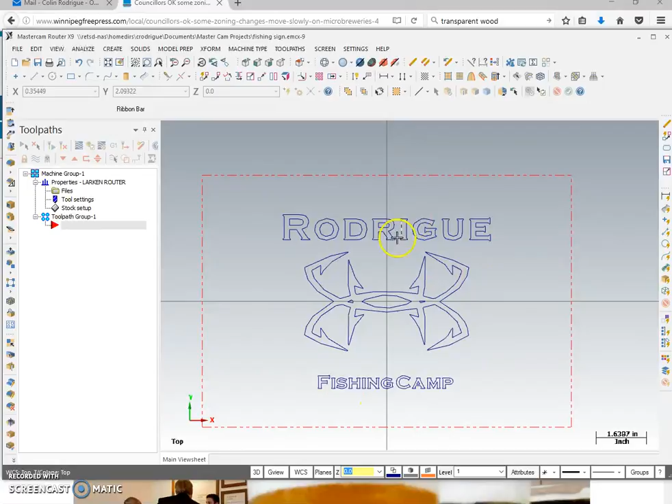So we have our original sign there, Rodrigue Fishing Camp. What I want to do is show you that you can use the router to cut out the shape for you if we wanted. We could do just a simple rectangular sign, or we could make different shapes out of that. You could draw a circle around it if it was the right size, or you could draw an ellipse, an oval. We're going to go ahead and create a rectangular shape.

What I'm going to do is turn it into an oblong shape or an oval at this point, and we want to do our anchor point from the center here. That means we're going to start it at the origin where our XY axes meet. So I'll go ahead and click there once, and you'll see it comes out from the center equally. I'm going to draw this as big as I can and have a look and see if that's what I want. Oh, that'll be a really nice shape to have.

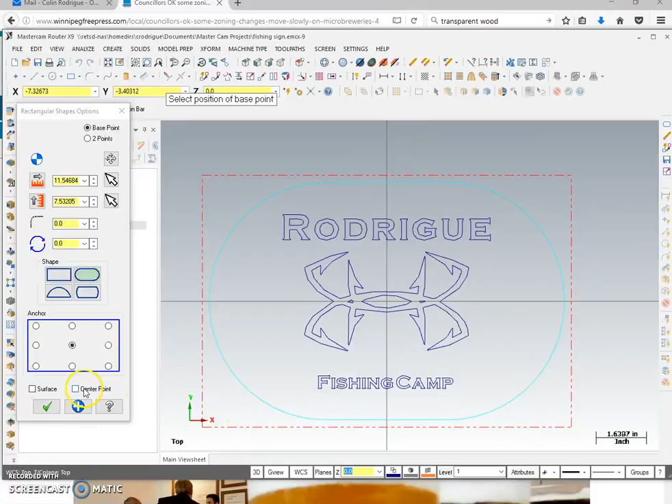So exciting. We could also go ahead, I'm going to click OK here just to get out of that and save it because we're happy with that. But just to let you know, you could also download a shape or a picture, and you could find a fish shape and have it cut out that shape as well. There's all kinds of shapes you can do, right? Stars, moons, whatever shape you want to have on there.

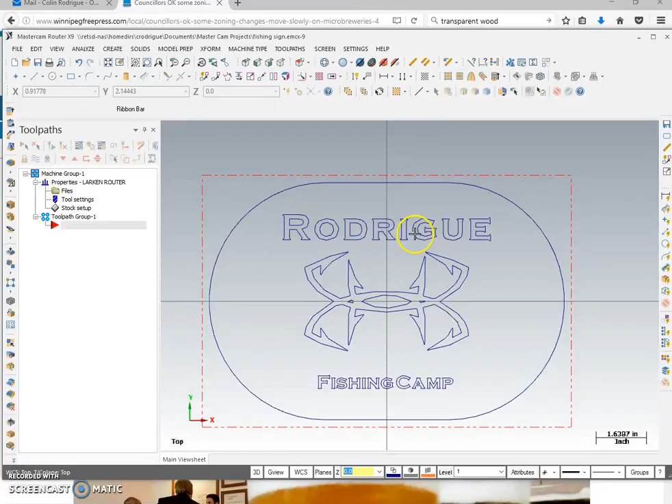So what we can do now is tell it how we want to cut that shape out. We had that original toolpath, but I got rid of it. We're just going to review that again, and we're going to have it engrave this part here. So I'm going to go ahead and select all that, and I'm going to go transform, toolpaths, contour, fishing sign, and let's draw that again. I should have picked that first.

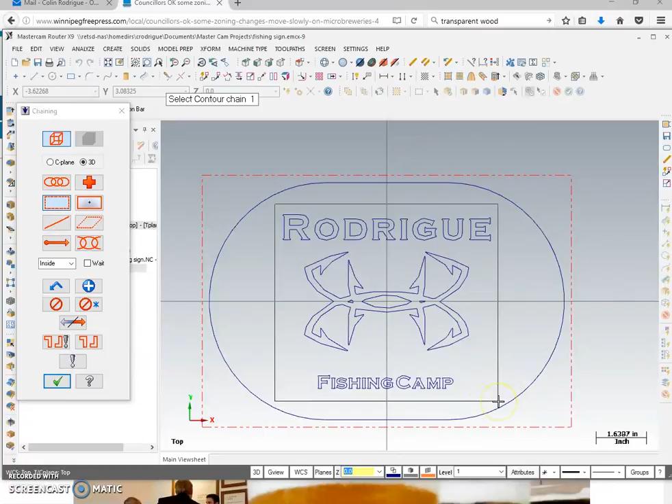So you'll notice here sometimes you have to select, we want to do a window. We're going to do that, and we're going to just select around what we want it to engrave. I don't want it to engrave that oval, I don't need it to. I want to make sure I have all my letters and pictures selected, go ahead and sketch approximate start point. We'll start it there, why not? And then we go ahead and click OK on there.

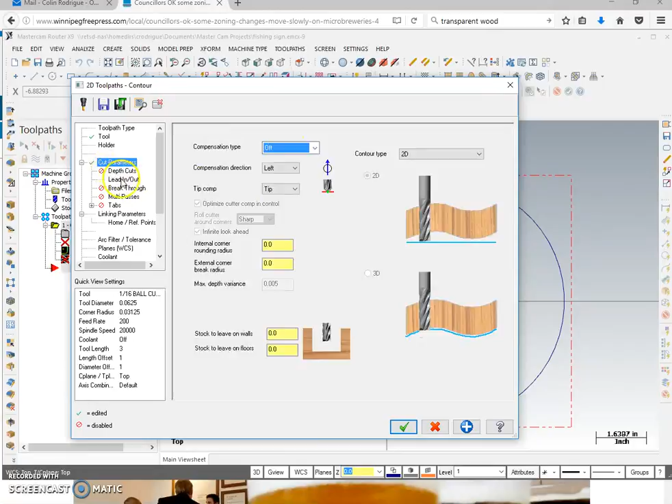Toolpath type is a contour at this point. Tool is a 1/16 inch bit, which is good. Then we go ahead and go to cut parameters. We've done this before, this is a review. We turn that to off, we do not want lead in, lead out. And we just go to linking parameters at this point, and we change all of these to absolute. Then we go ahead and set our depth at 0.03, and we click OK.

That's going to engrave Rodrigue, the Under Armour fish hook logo, and Fishing Camp. Exciting, great. Now I want to have it cut out this oval sign for me. I could cut it out on a bandsaw by hand, I could draw that and do that, I could, but I can also have this machine do it for me.

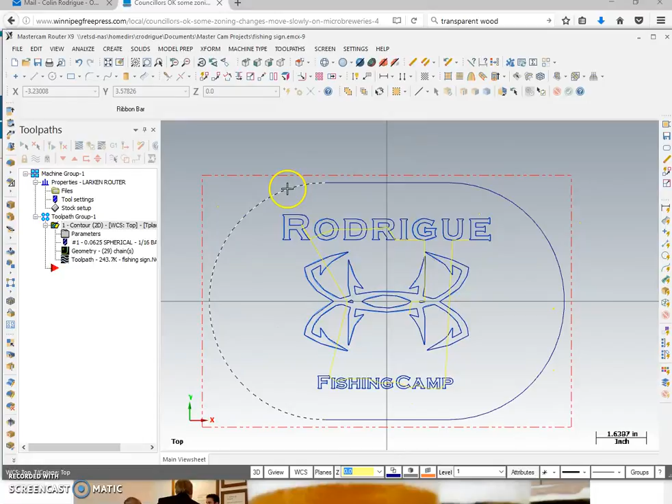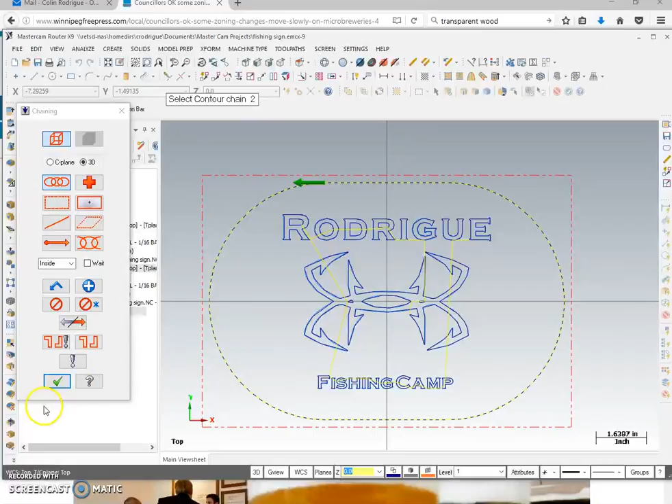So it's a different toolpath, we're going to have to do a separate toolpath. So we go toolpath, and then we go ahead and choose contour again. We're going to use chaining to select it this time, so we just want to select this chain of the oval. I click that, and you'll see here it highlights that whole chain. It didn't highlight any of this stuff, I don't want it to do that, just that outside oval. And I go ahead and click OK again. This time it's a contour again, but our tool is going to be different though.

We're going to use a 1/4 inch straight bit for that. So we go ahead and find that here. Straight bit, 1/4 inch, number 145. That's the size of our cutter to cut that out. We go ahead and click OK.

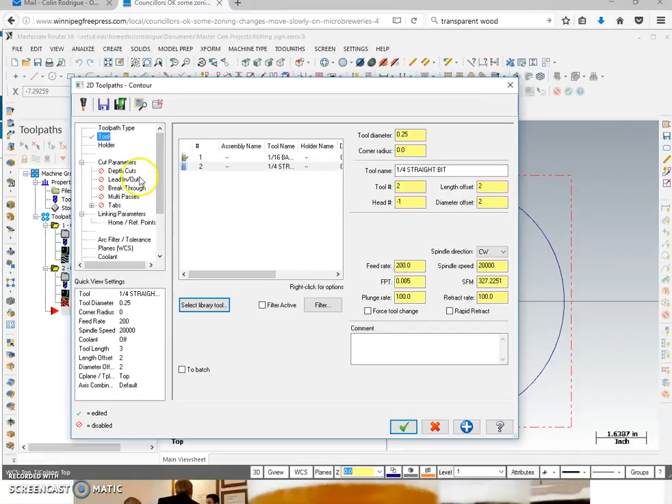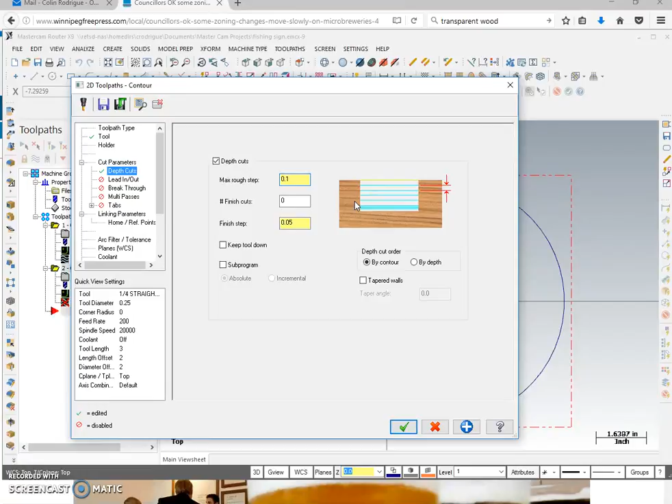Now, cut parameters. That can still stay off, that's fine. Depth cuts, we have to do depth cuts. We don't want to make this in one cut, it would break the machine or break the bit and just be unsafe. So we have to add depth cuts, and our maximum rough step will be 0.1. We'll make it an 1/8 of an inch, 0.125, and then it'll do the last one at 0.05. That's good, we're happy with that.

Lead in, lead out, we don't need that at this point. One thing we do need to add though is tabs. A tab will leave a little bit of wood at the 4 corners so that when we cut this out, this part doesn't break free and slide into our cutter. So I'm going to leave a very thin little bit of wood at the 4 corners. I'm going to show you how to do that now.

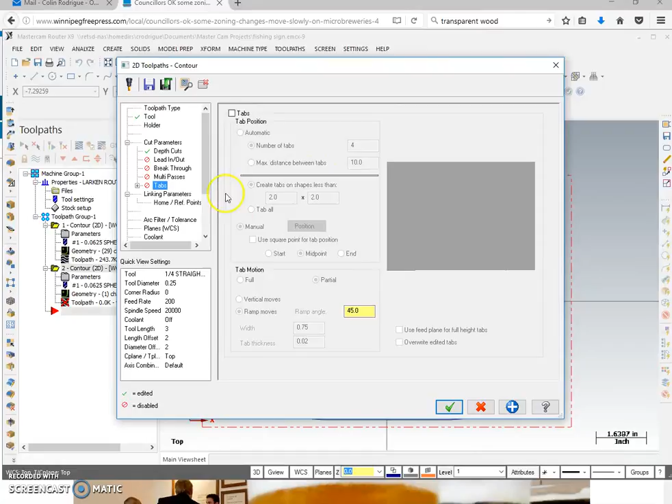So we select tabs here. We go to tabs. Now, we could have it automatically position tabs, but I don't really want to do that. So I go ahead and change the size of my tab. 3/4 of an inch wide is fine. I'm going to make them 1/8 inch thick, so they're a little bit thicker than what it suggests, which is fine. Now position, you'll notice this little window pops up here. You got to look for these little windows, they're there sometimes when you don't expect them.

Select chain to add tabs to. So I'm going to put one here. You'll see there's my tab, I slide it around. I'm going to put one there, one there, one there, one there. Now if you read this whole thing, it says select chain to add tabs to, press enter when done. So now we go ahead and hit enter on our keyboard.

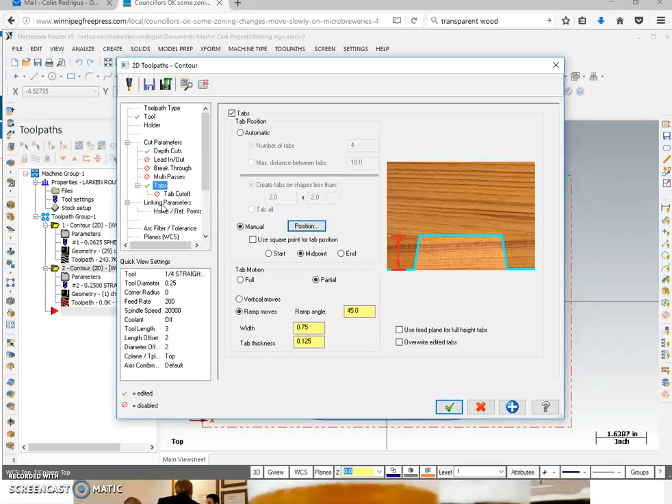We're back to our 2D toolpathing. We've done the tabs, that's okay. It's going to leave that little bit of wood we can just cut off quickly on the bandsaw and sand the tab off. Back to our linking parameters. Our piece of wood in this case was 3/4 of an inch thick, so our depth is going to be -0.76. We'll have it go a little bit deeper than what we need to, just to make sure we get through and cut that out. Okay, we go ahead and click OK.

Now we're at the point where we have the contour to do the engraving, and we also have the contour to cut out this oval shape for us. Now, what do we want to do? We want to verify this. We go ahead and click the select all operations. We're going to regenerate them all so that they've been refreshed, and then we're going to verify selected operations. Go ahead and click that.

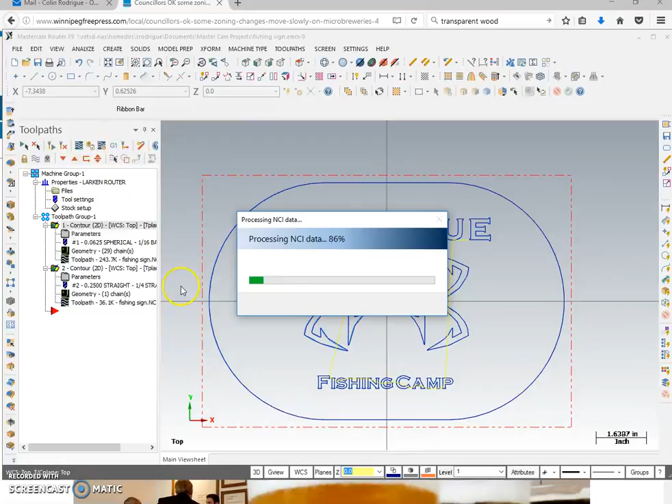It's going to do a little bit of thinking there. Never hurts to think. Now, if you take a look here, this is our piece of stock, this pink board here. And we go ahead and click play. Then it's going to do our engraving, and then you'll notice if we did it, let's go back a little bit. I wonder if we can slow that down just a little bit. Let's play that again.

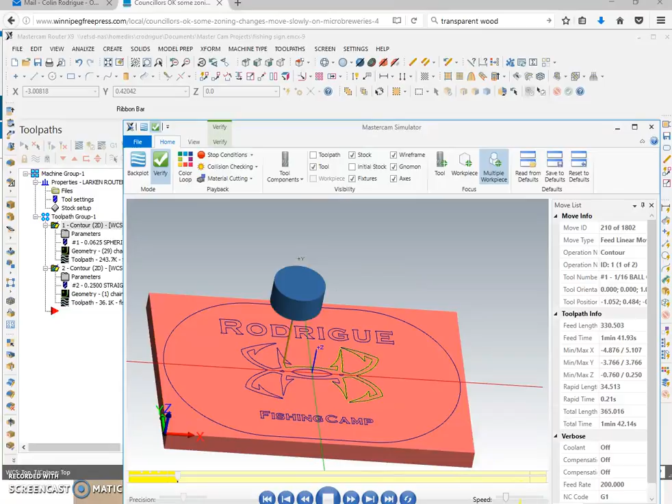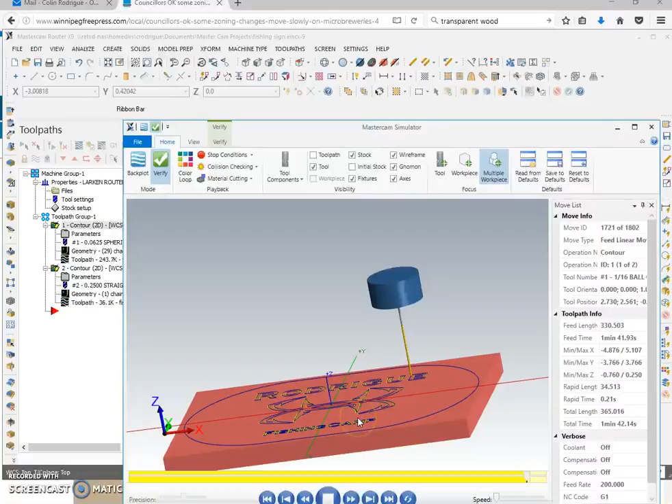Okay, you can see that it's doing the engraving of our logo, my name. Let's speed it up just a little bit because we're going to just show at the end here. I want to show how it's going to do that in multiple passes. It's going to change the bit to 1/4 of an inch on here. Okay, see how it changed it? 1, 2, 3, 4, 5. Leaving the tabs there.

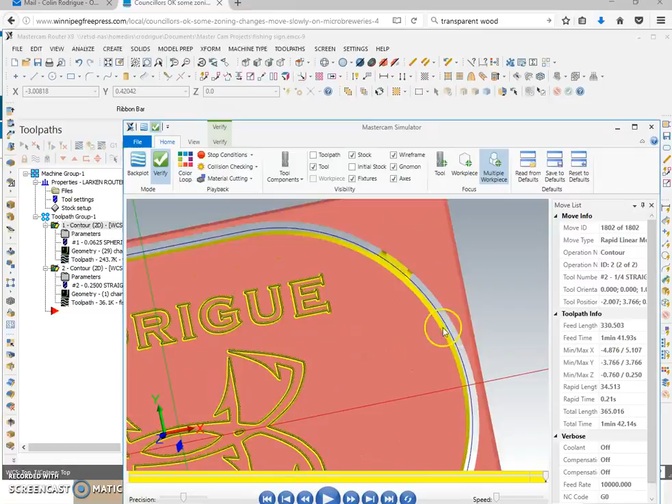6 passes. So it's going to take 6 passes to cut that out. You can see here how it's left that little bit of tab material there. Now that piece is still anchored to our main piece of wood. It's really important to do, okay?

So now we're done with that. We can go ahead and close that. We can see that it's doing what we want it to do. If it's not looking right, then come and get me and we'll see if we can figure it out.

Now, what we have to do is deselect all our toolpaths here. So we deselect them. Now, I want to export these one at a time. I now have to turn it into X's and Y's that our machine can understand.

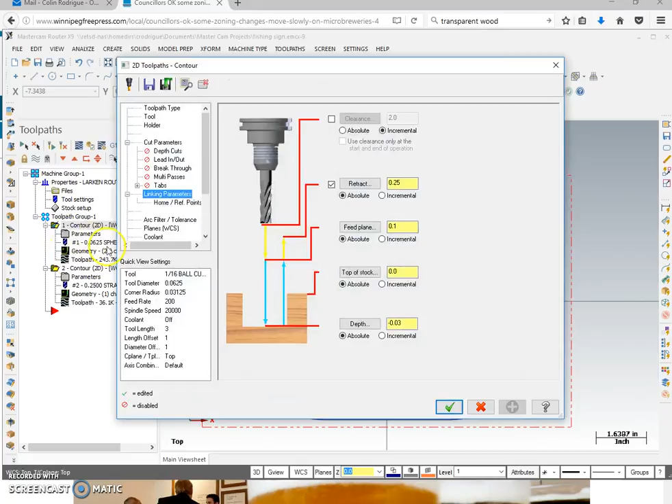So I go ahead and click on there. Go ahead and do that. So I have this one here. It's just got this green check mark on the folder there. That's really important. This is our engraving one.

So we're going to push the post selected operations there. You'll notice our Larken post is here. That's good. We go ahead and click OK. Now, I just have that one selected. It's really important because we have a machine that can only have one cutter at a time.

It's going to pop up here and say partial NC output file. Not all operations have been selected for posting. Post them all? No, we're just doing them separately.

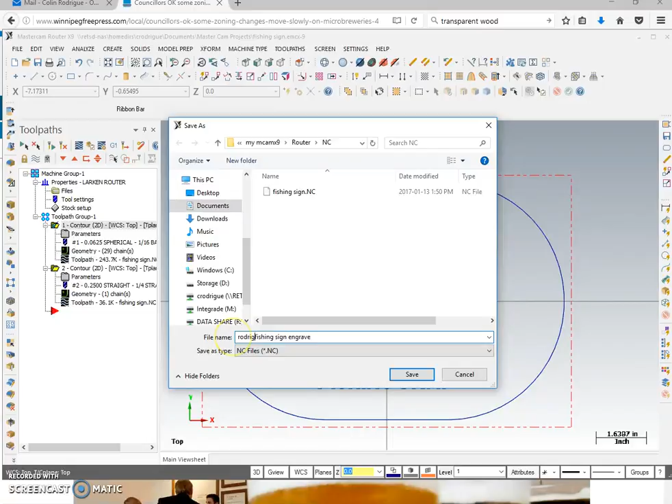So I would call this fishing sign, and I would call it fishing sign engrave. I would use my name if I were you so that you know how to find it. Let's just do that here. We'll say Rodrigue fishing sign engrave. And we go ahead and click save.

You would save it onto a USB stick, okay? Our computer out there is not hooked up to the network, so you have to save it onto a USB that we have. It should be around somewhere. If not, come and ask me again.

Do you want to view these messages? There's errors. It always posts errors. Just say no. You don't have to worry about that.

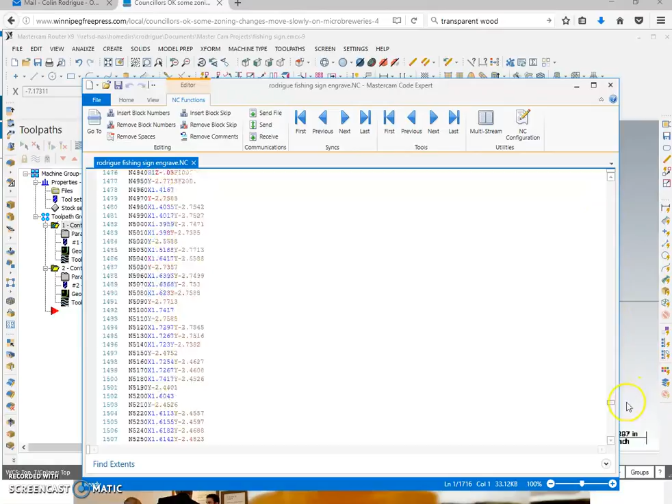And this is going to do a little bit of coding here. It's going to think about it, and it's going to show you this is what you would need to type in if you had to do this. You know, when Mr. Briggs was a young man, you would have to look at all and put all these X's, Y's, and Z's in there, and you would end up with 1,700 lines of code in order to do that engraving. Okay, we're done with that.

We close that out. Now we have to do folder number 2. I select it. The green check mark is only on this one. It's important. Again, we only want to have this one here. This is our cutout one.

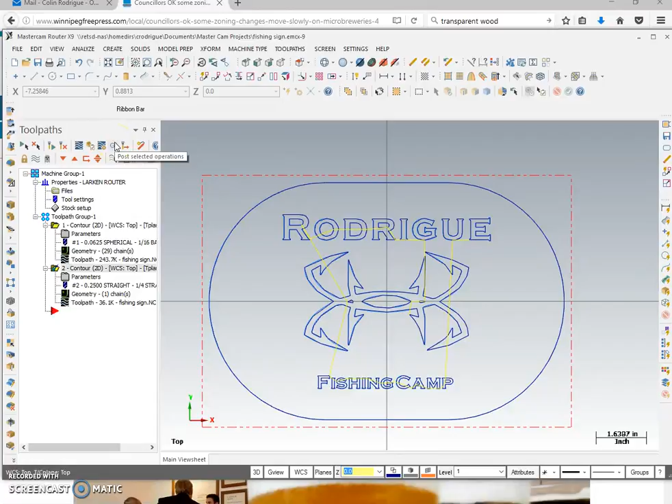We go ahead and post that operation. This should all be okay here. Go ahead and click OK. Post all? No, we don't want to do that, right?

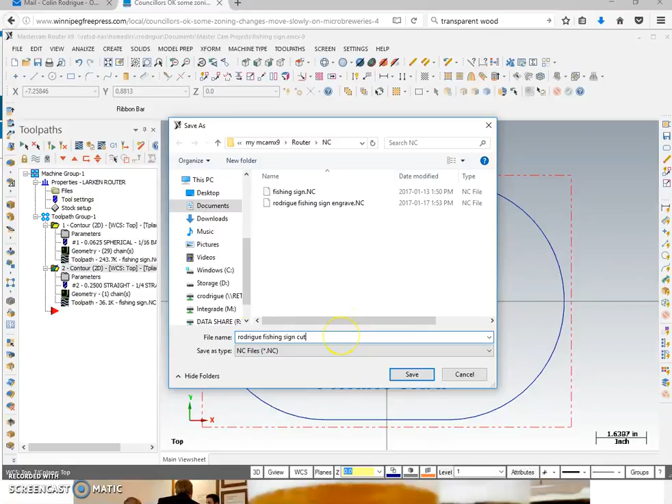This is our, because now we have to change the router bit. We have to engrave it. Then we put in our 1/4 inch bit, and we're going to say Rodrigue, fishing sign, and I call this one cut out, so that we know exactly what we're doing at this point, okay? I go ahead and click save.

I'd save it onto the USB so I can take it over there. Do we want to view the messages? No, we don't want to view the messages. We don't care. Yeah, I don't know why it posts message errors, but they're not really there.

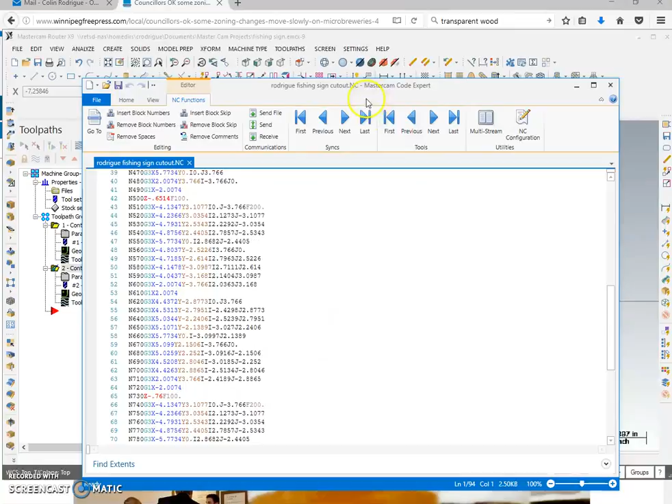They don't exist. This one here is a little simpler. You basically have 2 straight lines and then these 2 curves that it had to do. In order to do that, you only have to type 94 lines of code. Okay, you'll notice here it has all these G's, X's, Y's, and Z's. Okay, and this tells us where to go. All right, so we go ahead and close that, and we're done.

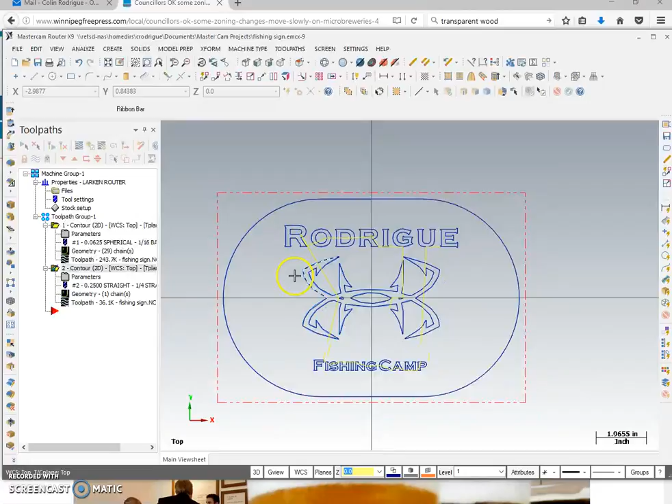We would now take our piece of stock, we would attach it to the router out there, we would run the spooler program, and we would run and cut this out. We would use the 1/16 inch bit first to engrave this, and then we would put our 1/4 inch bit in after and cut this shape out, and we'd have ourselves a nice little sign.